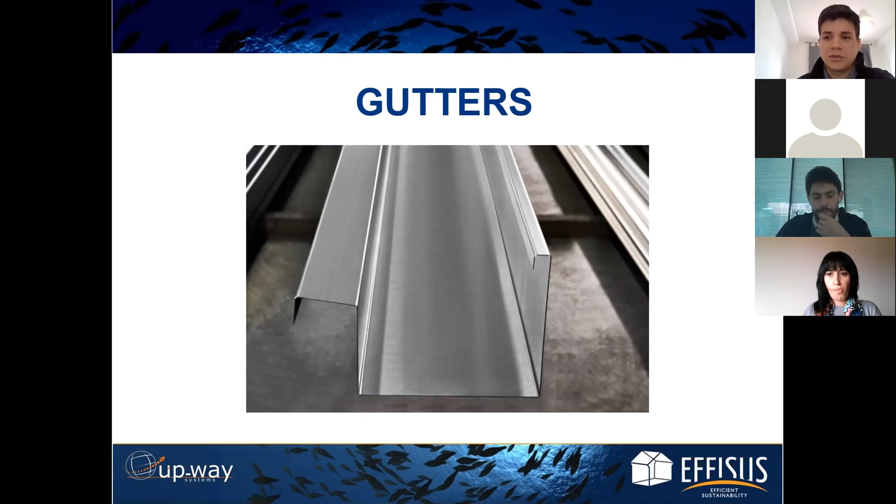There are many types of gutters. I decided to classify them into three categories today. When it comes to finishing, the most common one is galvanized. We also have stainless steel, which is less common, and masonry gutters.

Slope is pretty simple - there are gutters with slope and no slope. With no slope, Alexandra, this is a very specific type of gutter because they work under water pressure, correct? Once the water comes into the outlet and achieves a specific pressure, the drains activate and drain the water very quickly. So for these gutters, you don't actually need any slope.

When it comes to connection, this is the most common type. We also have welded, overlapped, or riveted connections, and then a sort of sectional connection as well.

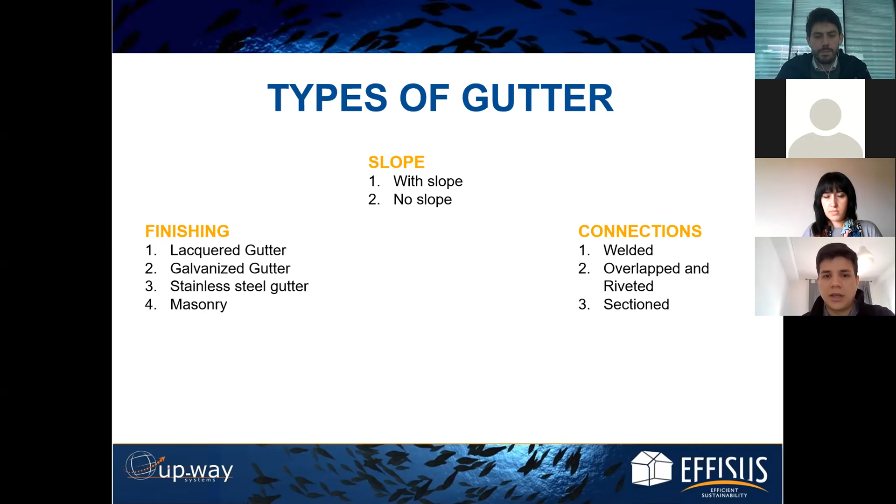As I mentioned, we're going to discuss these problems today, and I think it's important to mention them because most of them, as you will see, come from different reasons, but in the end, just a lack of maintenance would absolutely help if you just took a look once in a while.

This is a very common one: inadequate pitched gutters. What happens is you don't have the proper slope of the gutter. As a result, you get stagnant or ponding water, which accumulates at that specific point and eventually leads to corrosion, depending on the materials - starting a very fast process of deterioration of the gutter, leading to leaks and other issues.

Alexandra, is there anything you'd like to mention about this type of problem? This is a very common problem on gutters where the water cannot flow properly.

Just a minute. Yeah, I can handle here.

Most of the time these gutters are a problem for the building or warehouse because of corrosion. The corrosion is gained because of the dust that accumulates in the gutter, along with garbage that often ends up there. Since gutters are typically only cleaned once every year or two, this allows corrosion to start and persist, which creates openings in the gutter that allow water to pass through to the inside - a serious problem.

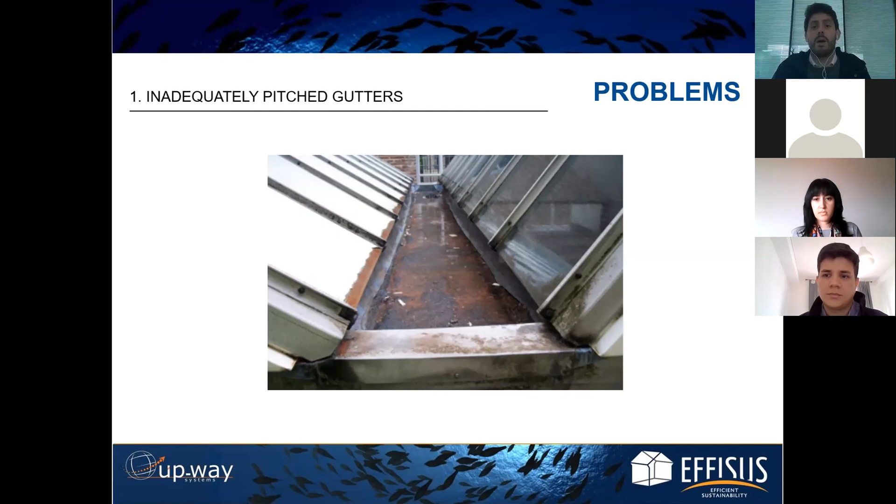Okay, thank you, João. So, we have Alexandra back. Alexandra, we already discussed the other issue - I'd like to move to another situation now, which is clogging.

What causes this? What are the main reasons? Especially when the surrounding area has a lot of trees or it's close to the sea, it's very common to find a dead bird on the roof or something like that.

We can have obstructions of the drain of water outlets. So the most important here is maintenance. Make sure that the gutter is properly cleaned and that we have no residues on the gutter, because this will most probably cause the obstruction of the water outlets, and then the water will not drain properly, and then we can have leakage because the water will reach a higher level.

But this will also contribute to a quicker deterioration of the gutter surface, because it creates a completely different environment on the gutter. So this will most commonly contribute to the development of corrosion or other pathologies associated with this.

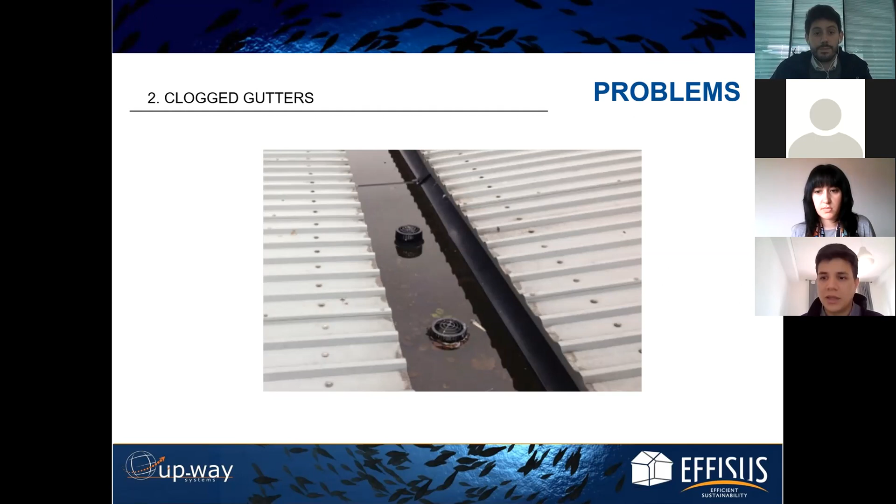When it comes to clogging gutters, this will of course depend on the surrounding areas. If you have many trees or no trees, this will determine your maintenance plan. If there's none, or if you see that it's clean, you will do just less maintenance. If there's more leaves or this type of dust coming in, it's important to mention all these types of problems—they're sort of like a snowball. One problem leads to another.

Here's another very important thing to mention, specific to the joints. The joints are the weakest point on a gutter, for many reasons. You have an open hole, and if it's not properly sealed, depending on the way you seal that joint, it will come to a very fast leaking.

Correct, Alexandra. Yes, the joints are actually the weakest points on the gutter. These are the points where we have to be very careful at all times. This means that we have to be very careful when performing these joints at the beginning of the installation. We have to be very careful on the solution that we specify and use to seal these joints.

But then we have to be very careful with the joints when we go to the roof and see how the gutter is, and when we go to do our maintenance operations, because the joints will usually be the first points to cause leaks on a gutter. So it is very important to check on the state of the joint, and if necessary, apply a repair solution.

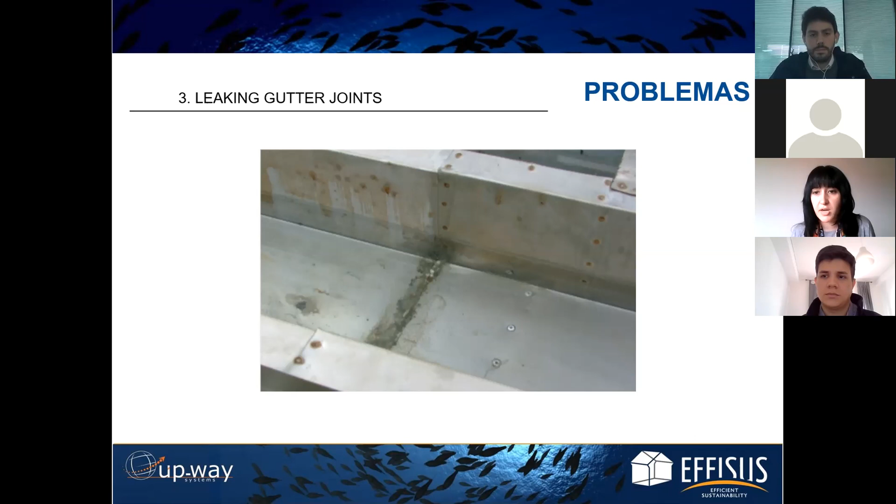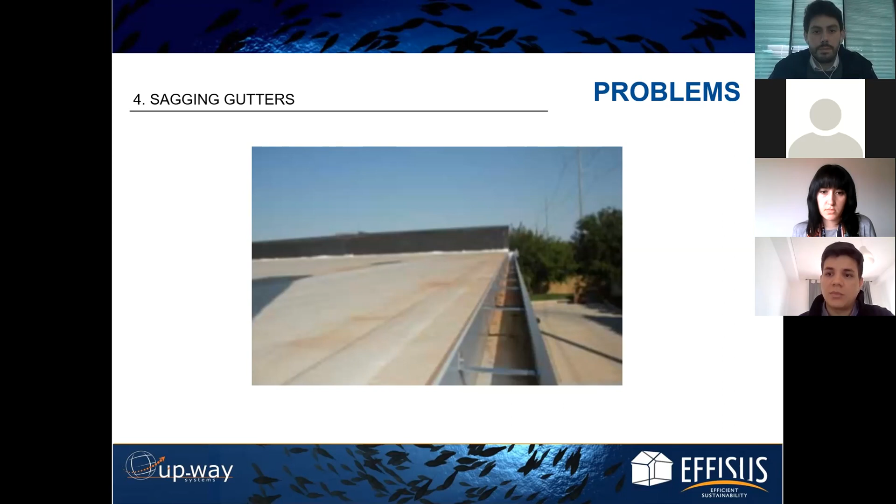Absolutely, so this is another problem. Again, when you have lots of water coming in, as I mentioned, it's sort of a snowball—one problem leads to another. And here you start having this problem, which is sagging gutters. This is because of the overweight of the water coming through, depending on how it's hanged. Some gutters have hangers, some have less hangers, and this will start sagging the whole roof, which will cause very serious, not only leaking, but structural damage to the construction.

Another very common one is corrosion. This of course will depend on what area you are in—if it's closer to the sea, depending on the finishing of the gutter, depending on whether there's ponding or stagnant water in the gutter. So this will depend. To come to that very strong stage will depend on the project and on the finishing.

But the most important thing is we see this when there's no maintenance. It comes to this state because they're not looking for it—they only understand when actually a problem happens. Yes, that's correct.

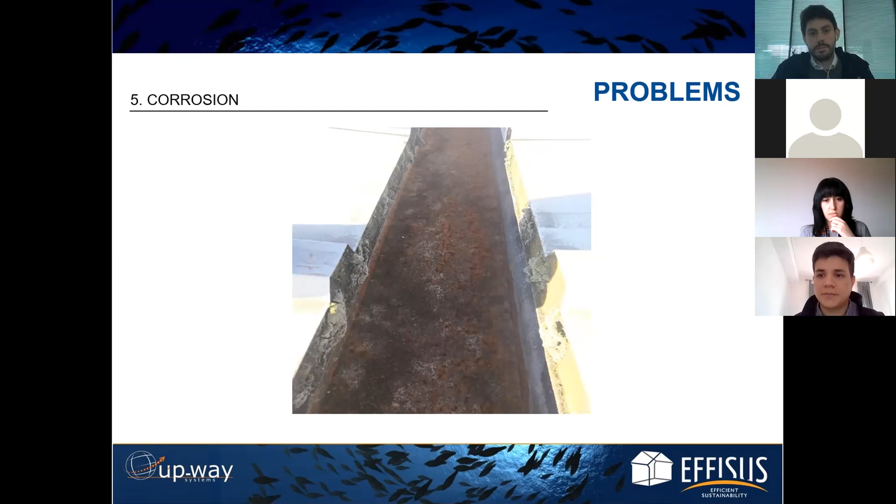So here are conventional solutions we see in the market. I'd like to bring up the specific solution, which is liquid and coating membranes—that's fine, but in comparison to ours which we're going to discuss later, it lacks a bit in some specifications. The main one: you need specialized work to do this. And in most cases you don't have the proper space to apply this type of material. As the manufacturer specifies, you need to apply a specific thickness for the whole material—we know how hard it is to apply this type of material—so there's pretty much no way you can be sure there will be the same thickness through the whole application.

Any other things that you like to bring here to discuss?

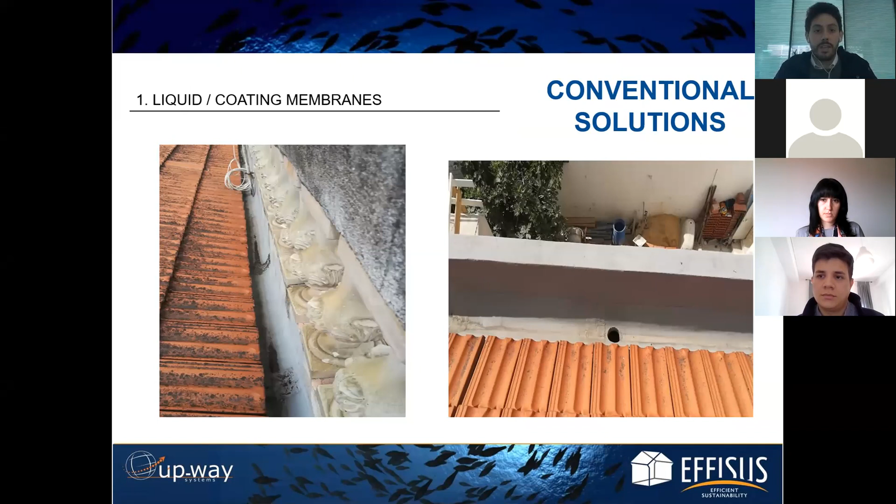Yes, of course. And João, we can't forget here that with liquid membranes, most of the times we can't do it all in the same day. It will take 2-3 days to finish the job, because you have to put one hand of the liquid membrane, then apply like a grid, and then another hand of the liquid membrane. So there's different coatings. The first one is with the liquid and sort of the net to give this structure a base to the application, and then another one. So it takes a long time. We know this is a difficult job because we can't be sure that the thickness we get in all the hands that we do is the same.

So this will be a problem because the gutter is already with some corrosion, with some holes. So it will be very difficult to perform this job. And when we can't be sure that the solution we use will waterproof all the gutter, we will have a problem. So we take some other solutions like asphaltic membranes, bitumen membranes, and combine them to perform one job only.

It will be a problem because we know these are different materials. They will have different behaviors, and we know perfectly we should work with one solution that guarantees the adhesion between all the gutter and the membrane. And we know that the gutter has some rust, and we need to do this with some professionalism. So we need to shine in our work. And when we get solutions where we go with different materials from different providers, it will be very difficult to have a good job done there.

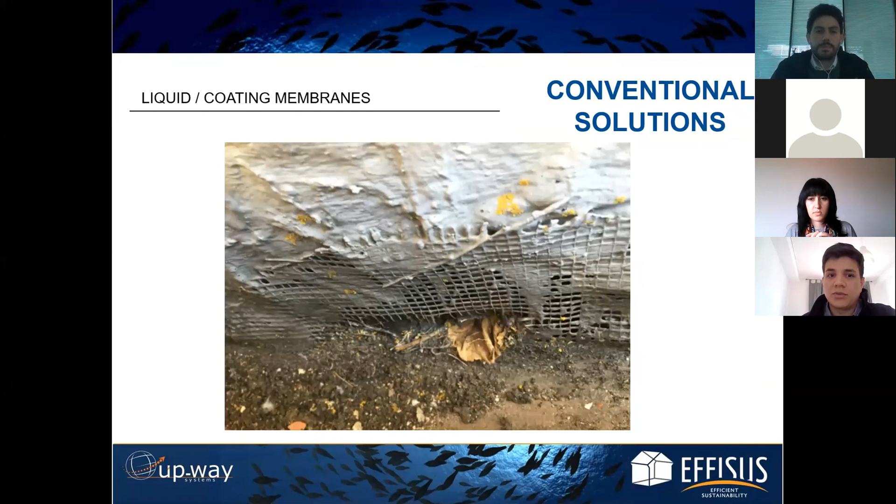As we see here, this is another type of application, correct, Alexandra? We see a lot of asphalt membranes.

Bitumen membranes are quite effective, especially on flat roofs when we have space to work with them. When we are talking about a gutter, the limitation of space makes it require specialized labor and specialized tools, and also requires some space for the people to work properly, which we don't usually have on a gutter. So it is a solution that is very hard to apply on a gutter and to get a properly well done job.

I think it's important to mention, Alexandra, is we should have a solution that could perform by itself. It has to be really simple, the application. It's hard to rely only on the labor work, because these materials are very good, but again, if the application is not done well, there would be a lot of fails, a lot of problems. Yeah, that will be the trickiest part here, the installation itself.

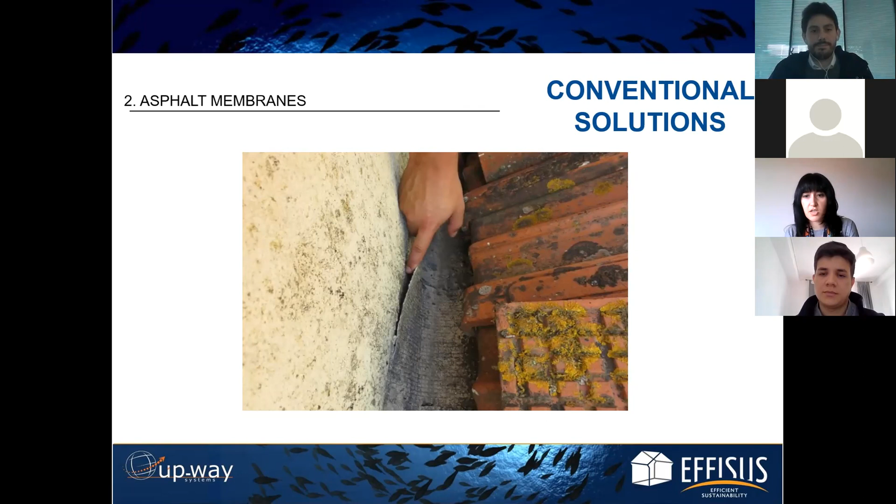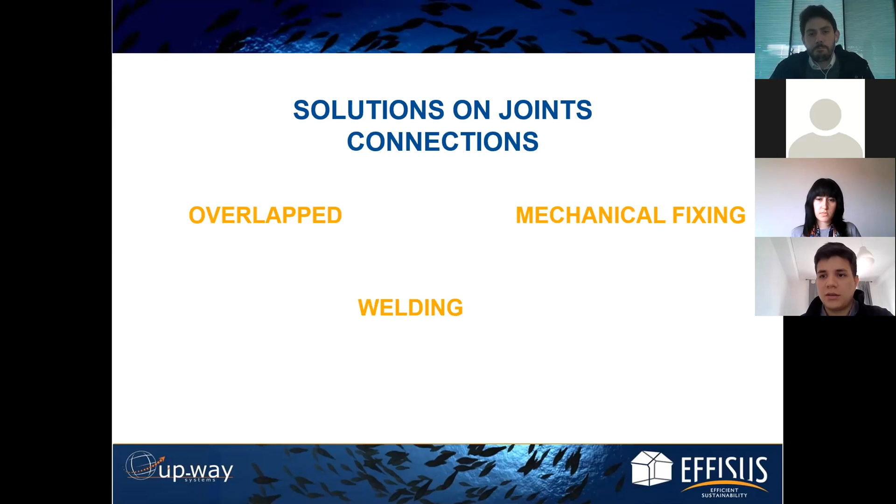So specifically here, when it comes to the joints connection, we decided to bring these couple types: overlappage, welding, mechanical fixing. This is what we see a lot. So Effisus has a specific solution for the gutter joints. We call it TiteGutter3, which is composed by 3 levels or 3 materials that we're going to talk about later. It's a high elasticity, flexible product, because it's based on an EPDM membrane, the first layer.

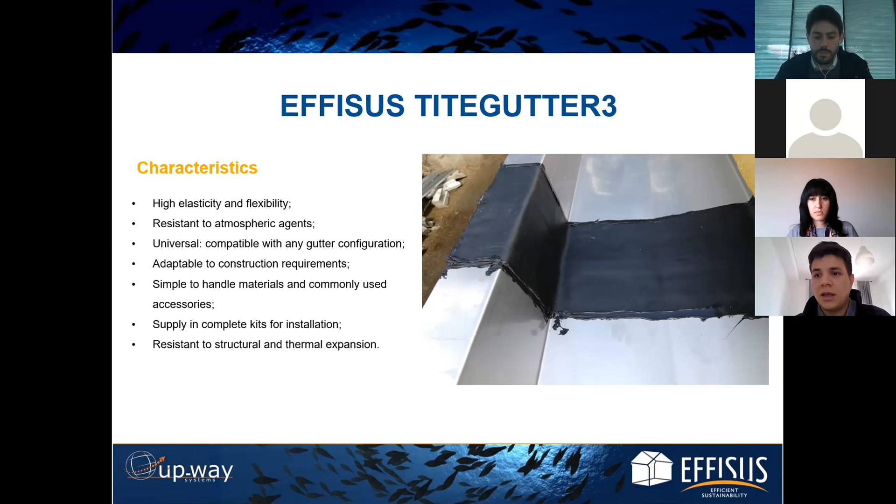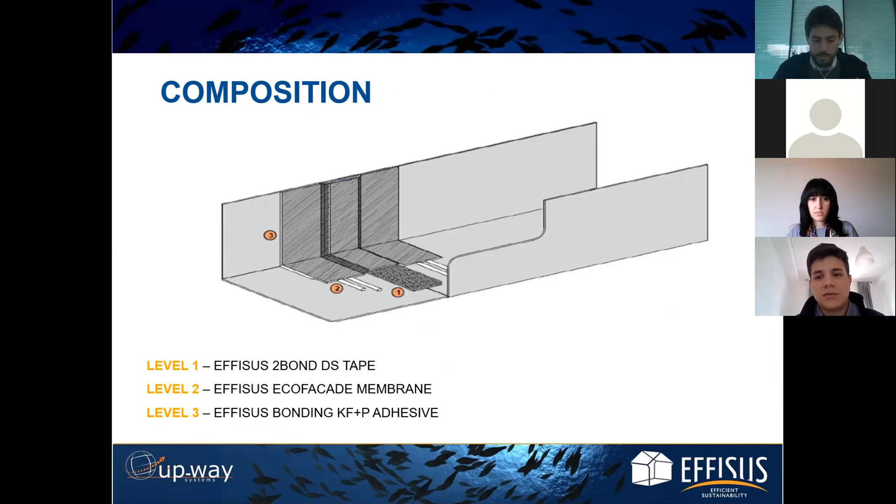It's supplied in kits. It's a very easy installation. We supply all the materials you need for the installation. It's everything you need for that specific point, because it resists UVs. It's 100% watertight. It allows a lot of thermal and structural movements and expansion. As I mentioned, it's a 3 level system. In this case, it's composed by first a 2Bond DS tape, then the Ecofacade membrane, and we apply a bit of adhesive on the sides, our Bonding KF+P.

Talking more specifically here of all the 3 levels, we call it a 3-level waterproofing solution. It's important to mention that those things work by themselves, but we always have an extra layer, and in this case 3, that will perform very well together.

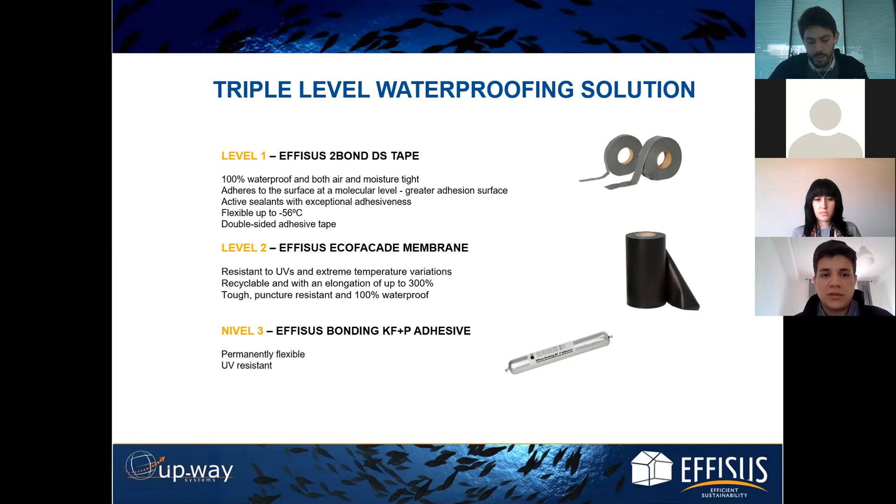The first one is a 2Bond DS tape, which is a very elastic and nice tape for specific joints. We don't only apply it in this type of material, we apply this tape for many solutions. On top of that, our Effisus Ecofacade membrane is an EPDM, UV stable, and then the sealant for the perimeter.

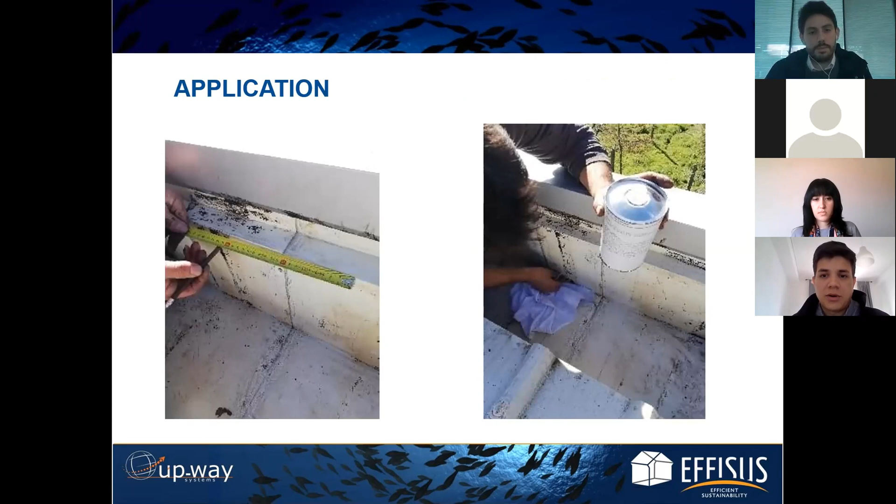Here I'm talking a little bit about the application. The first thing here, in this case, we decided to mark exactly where the middle of the joint is going to be. Then we use our cleaner - again this will depend on the state of the gutter itself, but we decided to use our own cleaner, in this case the Setup PR. Then we clean the substrate.

As I mentioned, the first one is a double-sided adhesive tape. You remove the foil and apply it exactly in the middle. The other one, the Effisus Ecofacade membrane, comes in rolls - in this case 20 centimeters, correct? Correct. So you cut exactly the extension or the dimension you want.

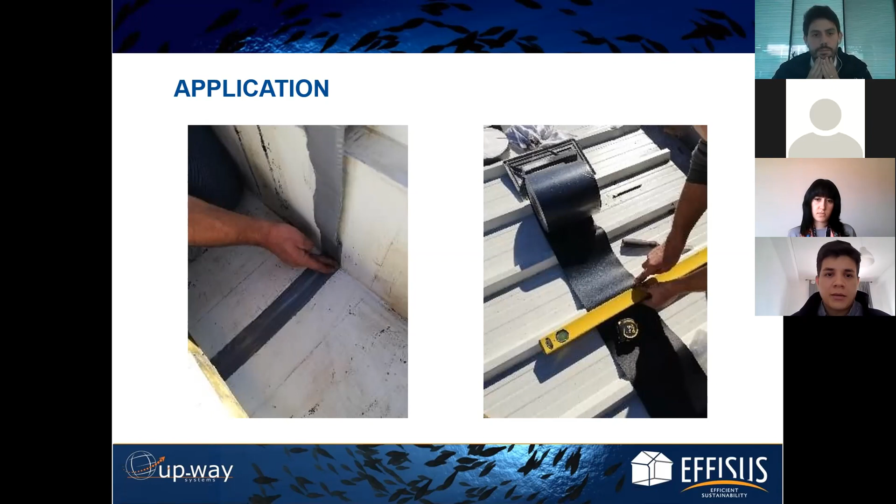After you measure exactly what you need depending on the gutter size, you apply that with 2 beads of adhesive, or bonding KF Plus P, and then for finishing, you apply the same adhesive just around the perimeter.

Alexandra, did I forget to mention something here in the application? No, it's just like you said. We basically have 3 steps. We apply the 2Bond DS tape over the joint, then we adhere the Effisus Ecofacade membrane on top of this. We bring it back, fold it back, and apply the 2 beads of adhesive. Then we put down the Effisus facade membrane, and finish with the finishing bit of adhesive to seal the edges of the membrane. We do have a couple of questions here.

Louis asked, can I apply the solution on concrete? Yeah, absolutely Louis. These materials are all tested not only on metal gutters, depending on the finish that I mentioned, but also on concrete.

Yes, just allow me to add that on concrete it's important to check the status of the concrete. If it is very old and has lots of loose particles, then probably it will be better to apply a primer before installing the solution. We can also supply this primer, but most of the time it's better to perform an analysis to check how the concrete is, and to confirm if the primer is required before applying the solution.

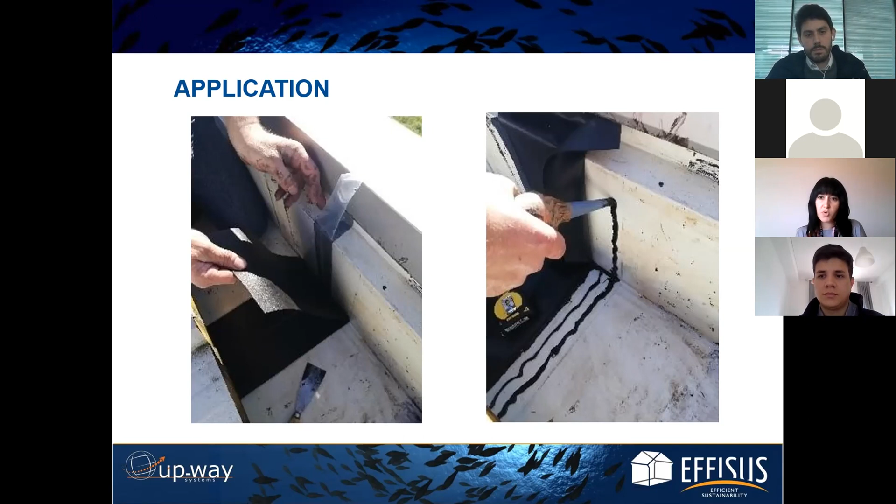Jack also asked, does the adhesive have the same durability as the EPDM membrane? Alexandra: Yes, this is a system, so all components offer the same durability, and we trust the solution as an integrated system. All components are compatible and will guarantee the same durability.

So here just a couple of things regarding TiteGutter3. It's very simple, very efficient, because the EPDM has over 50 years life expectancy, 100% watertight, so it resists water stagnation. I think it's important to mention that all these materials combined, applied to the joint, will not damage the finishing. This is important because when we're talking about solutions like welding a joint, this in the end will damage the joint itself.

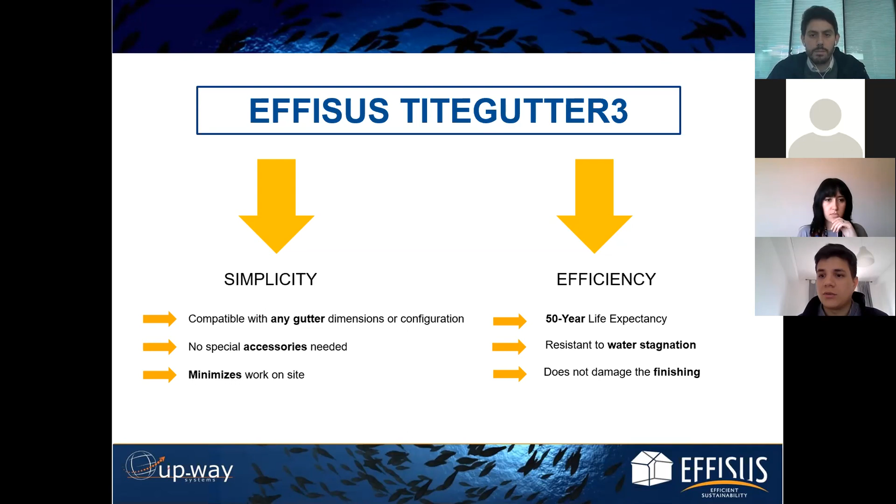So it's compatible with any gutter dimension. It comes in kits, as I mentioned. You don't need any special accessories for this application - everything you need will be supplied, and of course it minimizes all the work on site. Here's just a photo of an application.

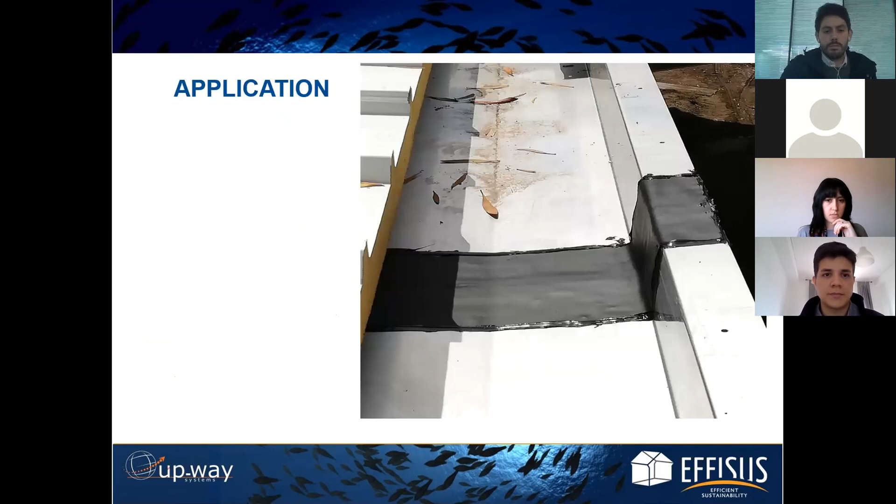Here talking more about the whole gutter itself, we brought Effisus AllTiteGutter. In comparison to the other product, this is to be applied at the whole gutter. So when we have situations that the problem itself is not only at the joint, but the whole gutter, we apply this solution, AllTiteGutter.

This is a self-adhesive EPDM. We'll talk more about the application itself later on, but you will see that all you need to do is cut into sections and then apply the whole membrane at the gutter. So we have no size limitations.

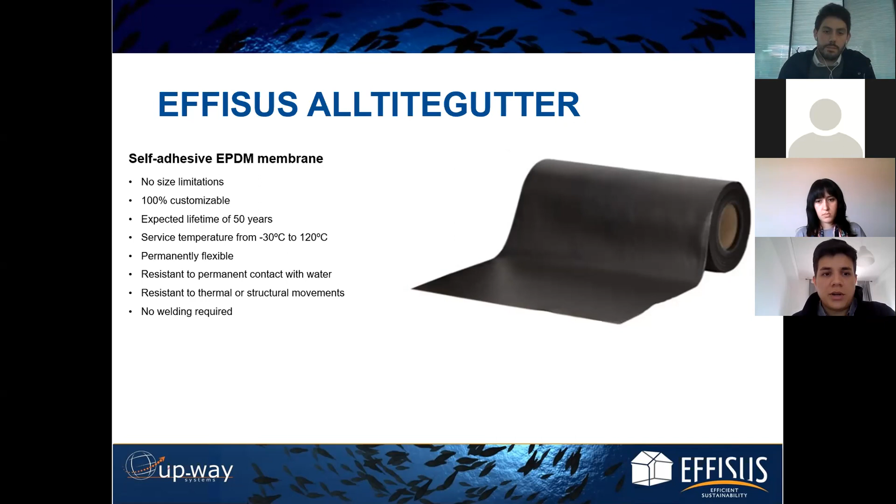What we actually need from the client in this case is sometimes a detail, a drawing, but a picture could also work, with the exact measurements of the gutter, and we supply the exact materials and quantity you need. Again, because of the material, it has over 50 years life expectancy. It can go to temperatures from -30 to up to 120 degrees. Very flexible, no special materials needed for this application.

As you see here, we already have a very damaged gutter. What we decided, this is important, as Alexandra mentioned, was to apply first a primer, because this will depend on the actual state of the material itself. We have two different situations here, Rui, correct me if I'm wrong. We have clients that apply this when it comes to really, really bad state, but there's also some clients that apply it when the materials are even new, correct?

Yeah, that's correct. So this depends on the client, of course. Many times what we need is to be present in the phase when the project is in study. So if we are present in that phase, we can contribute to start from the beginning with our solution in new gutters. So as we can see, there's two types of clients, and two types of situations: one before the project starts, and another like a question of maintenance.

When we have a question of maintenance, we need to see that the problem of the gutter is already very serious, because if the gutter leaks to inside, someone inside is dealing with that leakage. So it's very bad. What we do is evaluate the situation and start thinking to protect it on all dimensions. So what we do is place the membrane, and the gutter itself doesn't have any more contact with water. This way we protect all the gutter and waterproof it.

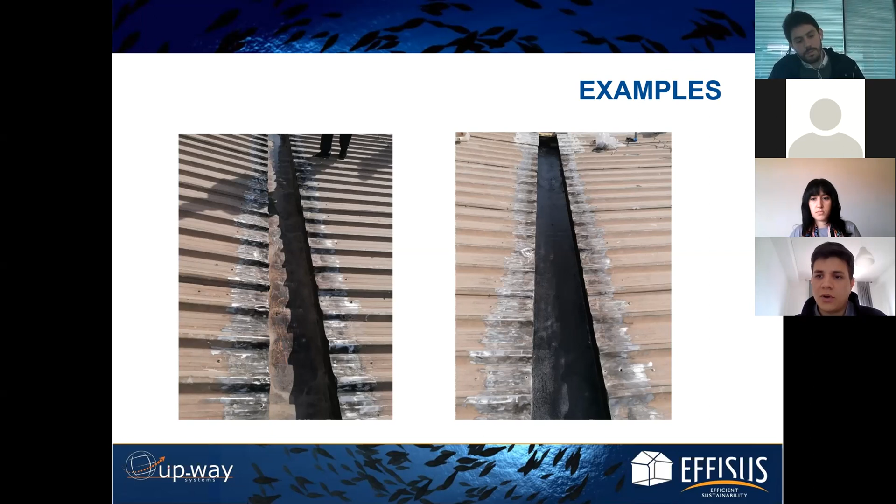I believe it's two types of situations: one before the project starts, when we can already start with the client on new gutters; another in a question of maintenance. Yeah, that's correct, Rui. I think it's important also to mention we are able to repair gutters in a really bad state, of course taking into consideration that the actual structure is not compromised. That's the only thing. But even with really bad corrosion and all types of problems, if it's properly cleaned, apply the primer, following all our guidelines, we're able to repair.

Here it's an example of the application. As I mentioned, it's a self-adhesive membrane. It's important to mention this is not just a simple EPDM — it's a reinforced, very robust and durable material in comparison to just a normal standard market EPDM.

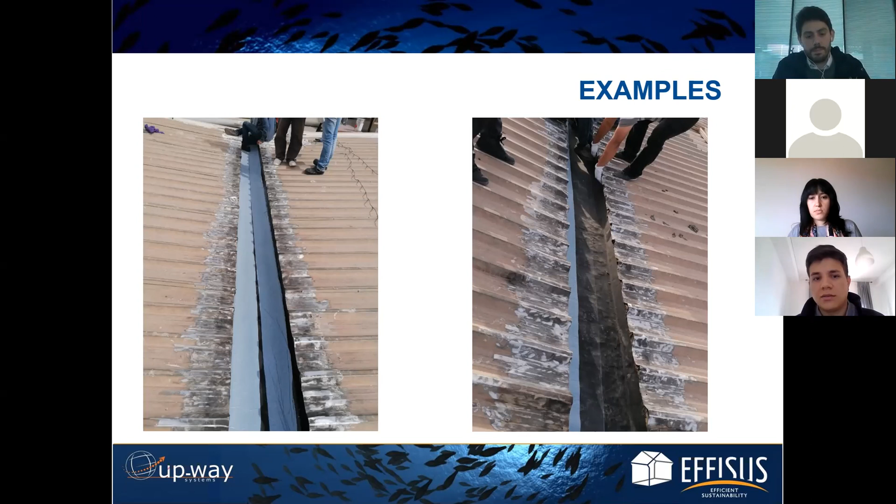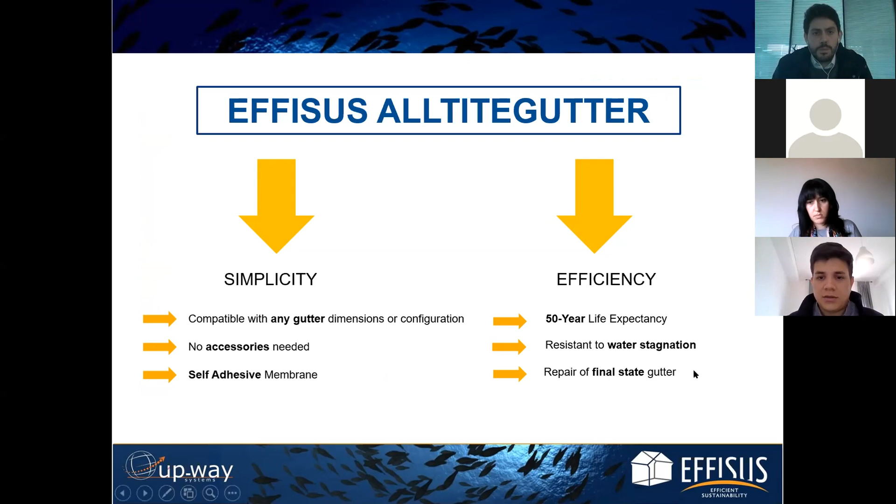Alexandra, can you talk a little bit more here about the installation? Yeah, Jean, maybe we can just answer first this question from Joseph, asking if I have a very corrugated gutter.

There is no problem applying this solution. We will have to understand more in detail how the gutter actually is, because I'm not sure if I'm having the right idea of the gutter shape. So probably the best would be to send us a picture or a drawing, a scheme of the gutter for us to confirm if it is possible to apply the solution.

Joseph, I would like to just say it is possible. We just have to look into the detail, of course, and then we have the solution specific for that. When it comes to corrugated or different shapes, we have a flashing tape that will work together with this membrane. Again, as Alexandra mentioned, we just need to look into the detail and see exactly how we're going to apply.

So, Alexandra, the installation of the AllTiteGutter. First of all, we have to check the dimensions of the gutter, because we want to order the membrane with the perfect dimension for the installation. For example, if the gutter has a total development of 1000 millimeters, then we will have to order the membrane with 1000 millimeters. So after this, we will receive the membrane and prime the surface of the gutter if required.

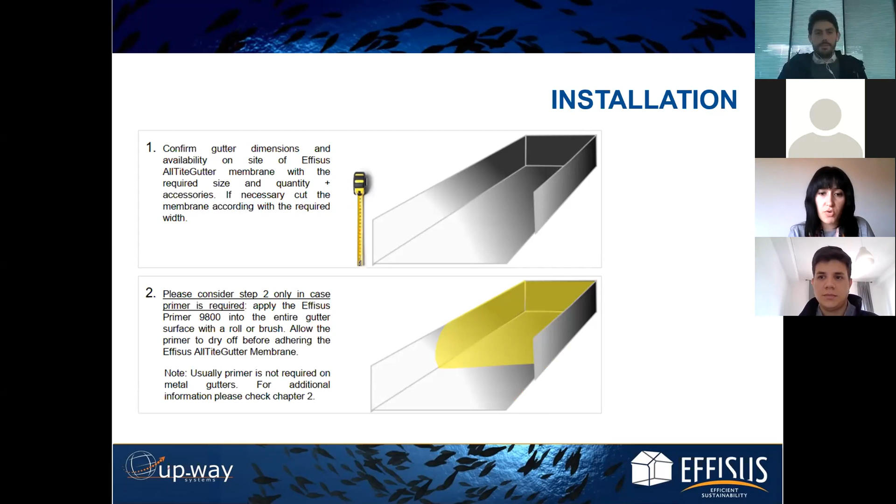As we were saying before, the primer may or may not be necessary. It depends on the gutter itself and how this is, if it has corrosion or not, and so on. Then, if the primer has been applied, we have to let it dry, and then we will start to work on the membrane. This has a protective foil.

We will mark the protective foil with the dimensions of the gutter bottom and sides, and then with a specific knife we will cut only the foil with these dimensions, and then we will start the installation. As said, this will depend on the shape of the gutter, but usually we will propose to apply the membrane first on the bottom of the gutter and then the sides, and the installation is basically finished. We just have to make sure that we fix the membrane at the tops.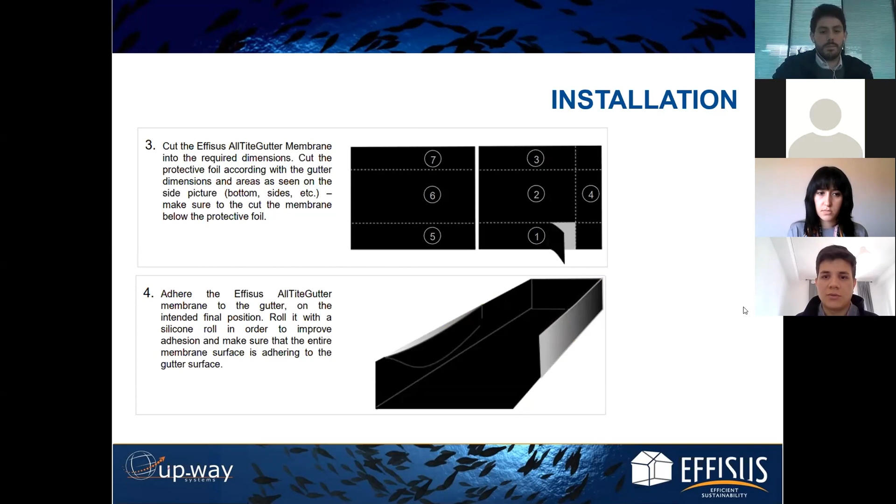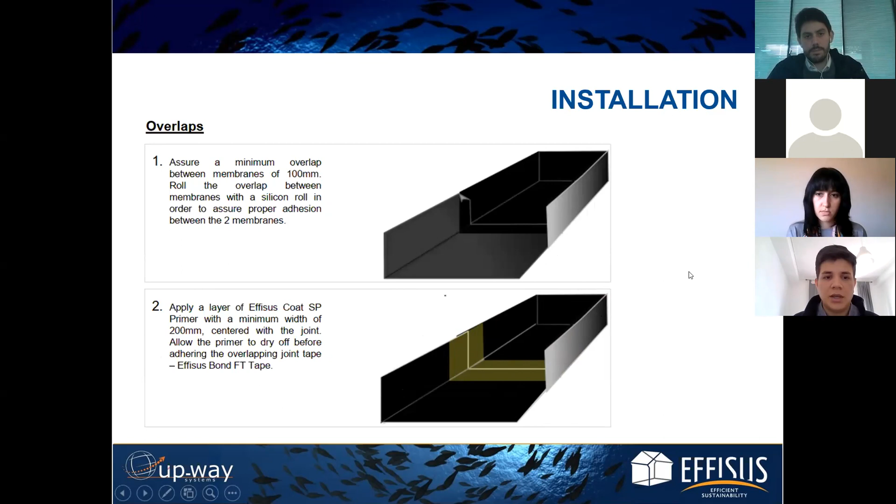When it comes to the overlaps, what we recommend is a minimum of 100 millimeters. So you apply the membrane and then you overlap more 100 millimeters. What we also recommend is to apply our Bond FT tape, which is our flashing tape. It is specific for the overlappings and as well for drain outlets.

We use it there, so you just cut a hole here, you apply. It's important to mention this material needs a primer applied before the application. So you just use a brush to apply the primer, and then on top of that comes the Bond FT. So again, you don't have to worry about any of this. It all comes in kits. We supply all the materials and all the quantities exactly for the need of the application.

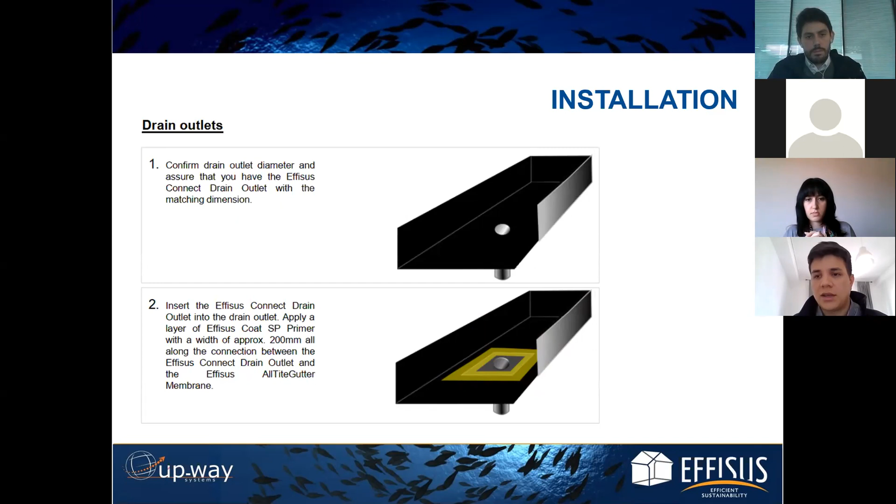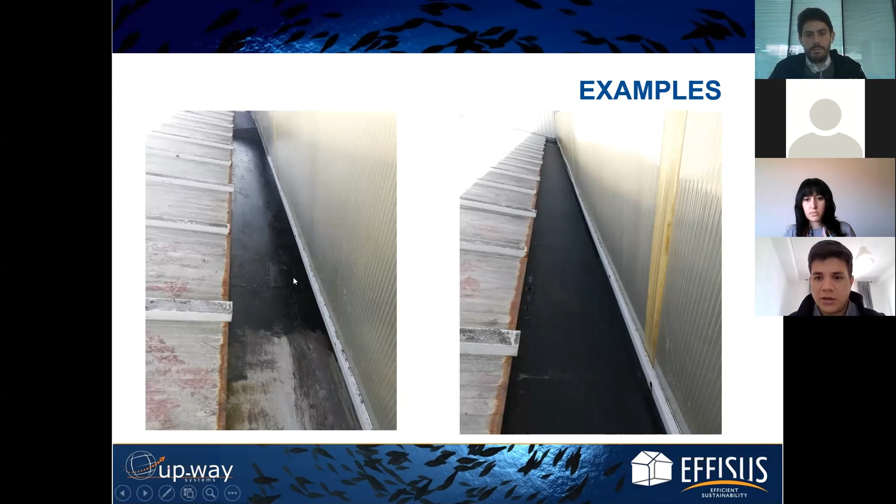And you have the final solution. In this case, here you see applying the primer, and then here on top of the membrane itself. This is, you see here, the overlapping, and as well how the drain outlets are made, in this case using the Bond FT tape.